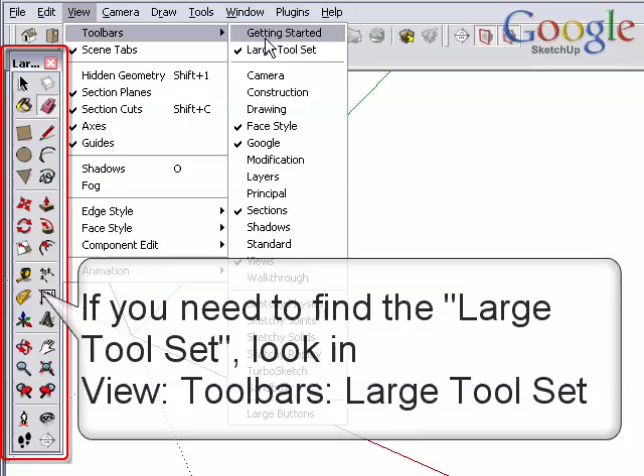Making good selections in SketchUp is crucial to properly using many of the other tools, including Move, Rotate, Offset, Follow Me, painting materials, or creating groups and components. The basics are pretty simple.

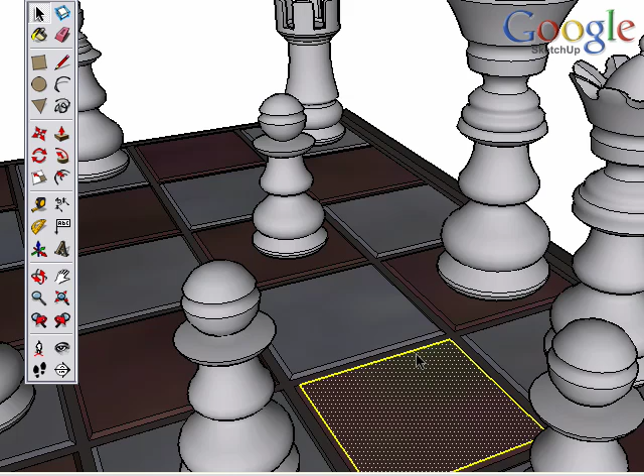You can select individual entities by clicking on them. This includes edges and surfaces, and objects that are grouped together. You can also select entities that are connected by using a double or triple click. One click will select the surface. Double-clicking on the surface selects both the surface and its bounding edges. Triple-clicking will select all connected geometry.

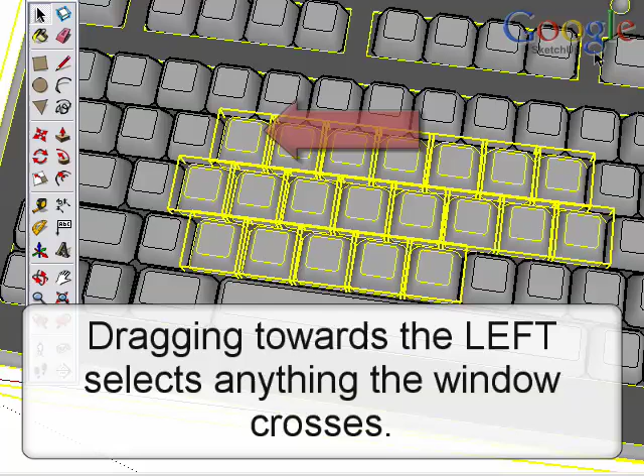You can select multiple objects by dragging a selection window around several entities. You can control what is selected by noting the direction of the selection window. Dragging a selection towards the left will allow you to select anything that the window touches. This is known as a crossing window. In this way, you can quickly select objects by just dragging a window across them.

For more control, drag a selection window towards the right. This is known as a selection window. With this method, you must completely encompass the entities you want to select within the selection window.

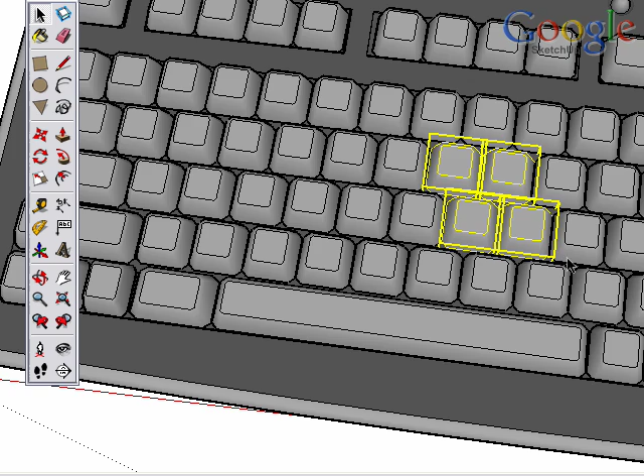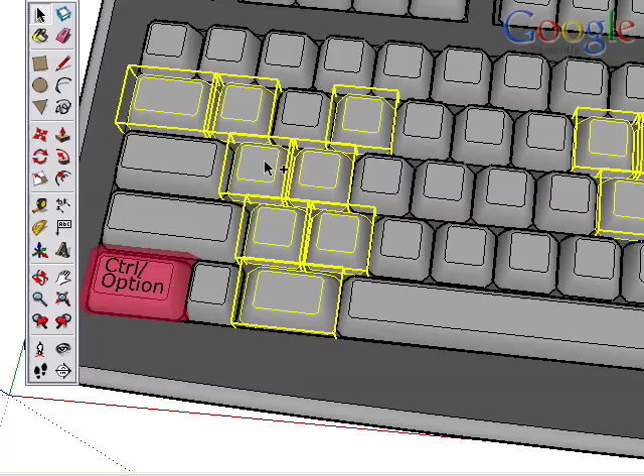Another method for controlling selections is to use modifier keys while making selections. It works like this. Hold the Shift key down and watch the cursor change and show a plus and minus sign. You can now add and subtract entities by clicking on them or dragging a window. Hold the Control key, or the Option key on a Mac, to only add to your selection, and hold both the Control or Option key with the Shift key to only subtract.

Let's look at some different scenarios on making good selections and share some tips from the experts. Say we need to grab all the windows at this level to move them together. If there aren't too many, we could just hold a modifier key down and click to add all the windows, working our way around the building.

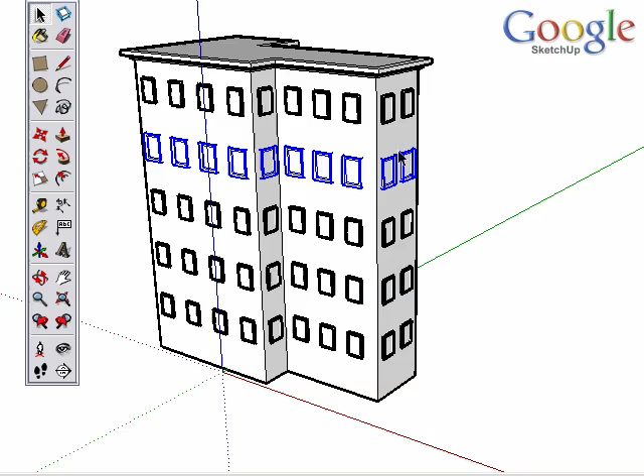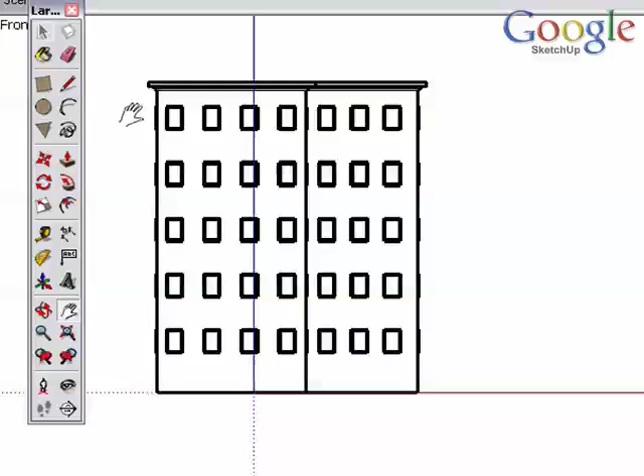Okay, so let's add a few more windows, and this time the task is to select every other row of windows. We could select them individually, but with this many windows, there are better ways to work. Toggle Perspective Mode off from the Camera menu, then choose a front or side view of the building. Now it is easy to drag a few selection windows around only the rows of windows we want. Remember to drag toward the right and choose the right modifier keys to add to your selection. With the windows selected, you can toggle the perspective back on and change your windows as needed.

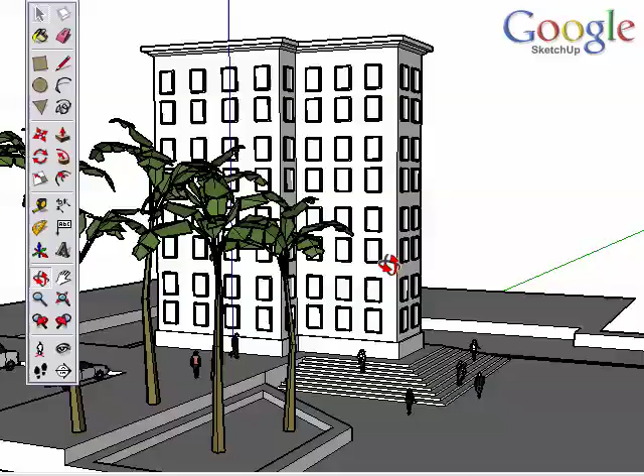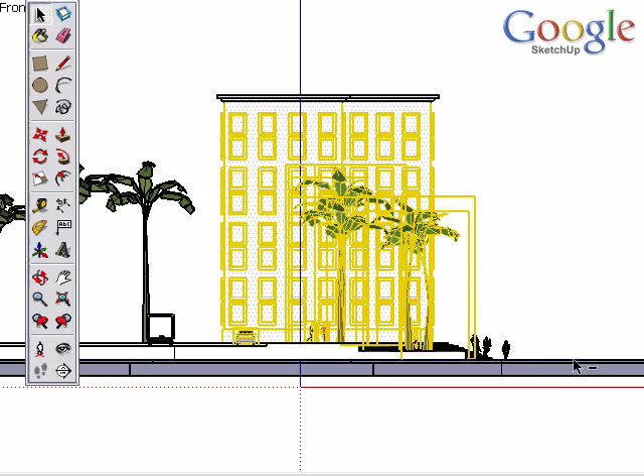Let's move even further down the project. When there is a lot of detail, you may want to try this method. We want to select several rows of windows again, but now there is a lot more in the way. Toggle Perspective off, pick a view, and make a big sweeping crossing selection to select everything you need. Then use the modifier keys to only subtract from the selection and do several crossing windows to remove objects. You can also toggle other views if needed, but the result is still a good selection that you achieved quickly.

One last tip is to toggle X-ray mode on and off as well to help you see what is and is not selected.